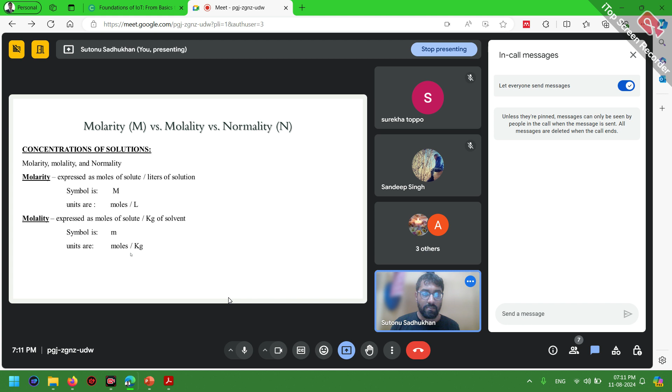Can anyone tell me what is normality? No one? Okay, so I'll again refresh the concept. Normality is basically gram equivalents of solute per volume of solution in liters, which is nothing but equal to mass of solute in grams into 1000, divided by equivalent mass into volume of solution in ml.

Now, as we are studying water science, what will be there in case of water? You see, in case of water, the density is generally dependent on temperature and pressure, but at STP, which is called standard temperature and pressure, the density of water is basically 1000 kg per meter cube, or 1 gram per centimeter cube, right?

So if the solution is very dilute, then you can see the molarity will almost be equal to molality, right? Because if the solution is dilute, then it will basically be 1 kg per liter as the density of water. So then molarity will approximately equal molality. But if the solution is not dilute, then it will not be equal, right? This is true for water only at standard temperature and pressure, it is not true for other solvents.

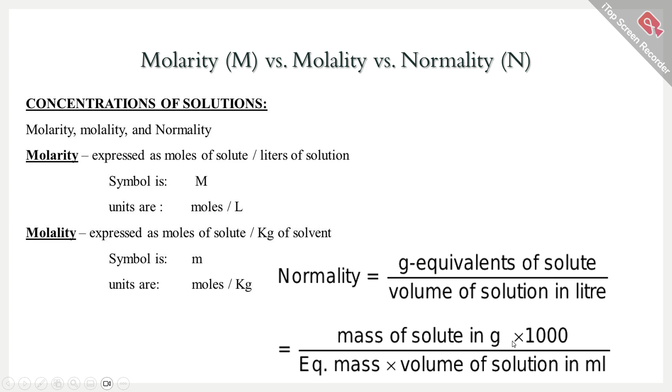And in case of normality, you can understand the definition, I guess. Do you have any doubt? Then you can ask, otherwise we'll proceed to our problem based on this concept.

Okay, now I'll give you an example. Consider calcium carbonate, which is a bivalent salt that causes hardness in water.

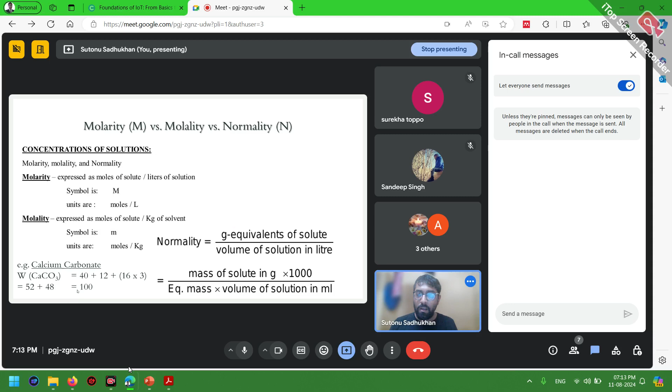In case of calcium carbonate, the weight is calculated as atomic weight of calcium, that is 40, plus atomic weight of carbon, that is 12, plus 3 into oxygen, which is 48. So 52 plus 48 gives you 100. This is the molecular weight of calcium carbonate.

Now, for this compound, if you put it into water, the amount of calcium carbonate that gets dissolved in water gets dissociated into two parts. One is called the cation and another is called the anion. The charge, that is the plus or minus sign with the calcium or carbonate ion, denotes what is cation and what is anion.

You can see, based on the cation, that is calcium, there is plus 2 charge, and carbonate has minus 2 charge. So the valency becomes 2. If you want to calculate the normality of calcium carbonate in water, you have to get the equivalent mass of the calcium carbonate.

How can you get the equivalent mass of calcium carbonate? The answer is with the help of valency.

So how can you get the equivalent weight or equivalent mass? Though weight and mass are not equal, here we are considering them equal. So Eq. W of CaCO3 equals the normal mass, that is 100 which we calculated, divided by its valency in water, which is 2 in this case. So it will be 100 by 2 equals 50.

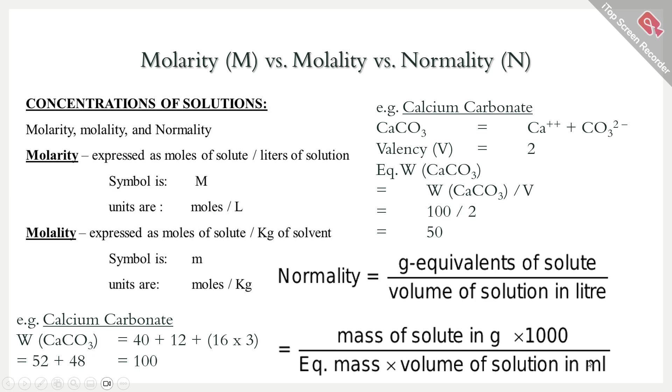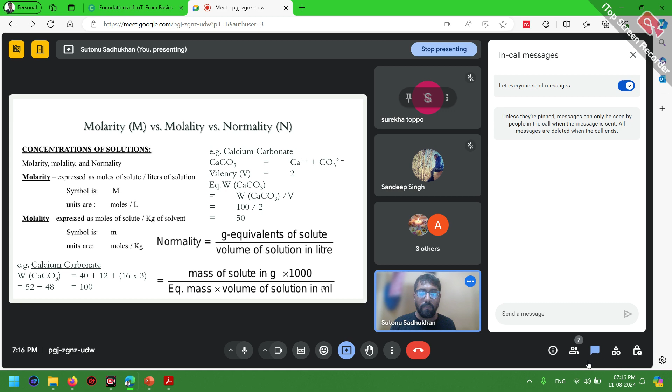Hope the concept is clear. The molarity, normality, and molality concepts should be clear enough so that you can solve the next problem, where the concentration of calcium carbonate is given as 250 milligram per liter. Based on that, you have to calculate the following.

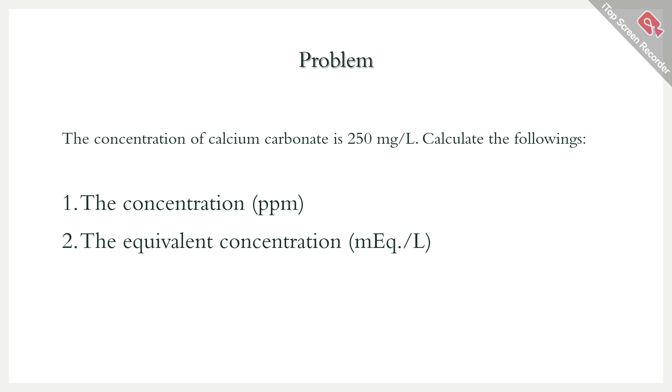Number one is concentration in ppm. Number two is the equivalent concentration in milliequivalent per liter. Number three is the concentration in ppb, and number four is the molar concentration in millimolar. As I've told in earlier classes, you need to determine the units.

If you attach the term milli to anything, that means 10 to the minus 3. Micro means 10 to the minus 6. Pico means 10 to the minus 12. Nano means 10 to the minus 9. And femto means 10 to the minus 15. I have discussed these things in the class.

So you should be able to understand parts per million, parts per billion. What does million and billion mean? Million means 10 to the power 6, and billion means probably 10 to the power 9, I guess.

10 to the power minus 3 means milli, so that means 5 milli equivalents per liter. If you are asked to calculate the equivalent concentration in milli equivalents per liter, it will be 5. Hope it's clear, if any doubt you can ask.

I didn't understand that, please repeat. You can tell.

Now next is the concentration in parts per billion. 1 ppm means 1000 ppb, because one is 10 to the power 6 and the other is 10 to the power minus 9. Billion means 10 to the power 9, million means 10 to the power 6, so the difference is 1000. That means 1 ppm equals 1000 ppb.

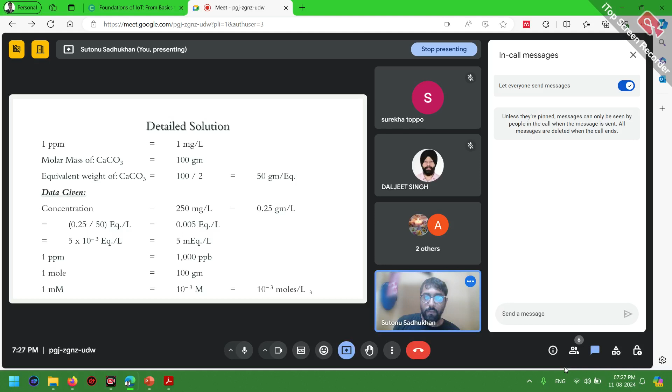So that means if you want to calculate the concentration in millimolar, it becomes 2.5. Any doubt?

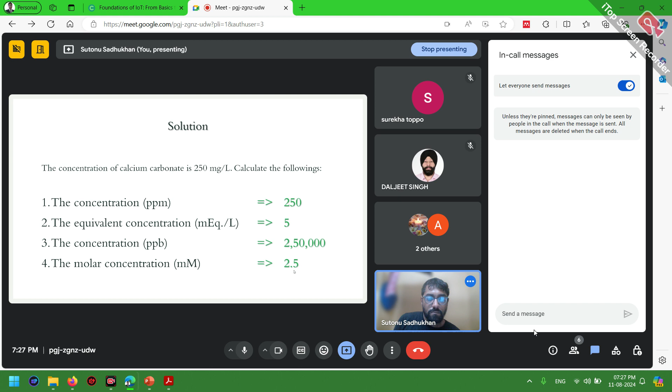You can see that within 1 liter of solution, there is 250 milligram of calcium carbonate. Now 250 milligram of calcium carbonate, if you divide it with 100 gram, that gives you 2.5 moles per liter.

Now what you can see here, they have given the unit in milligrams, not grams. So if you divide it by 100, it will become 2.5 millimole, not mole, which is also present within 1 liter. So that means molar - 1 molar means 1 mole per liter.

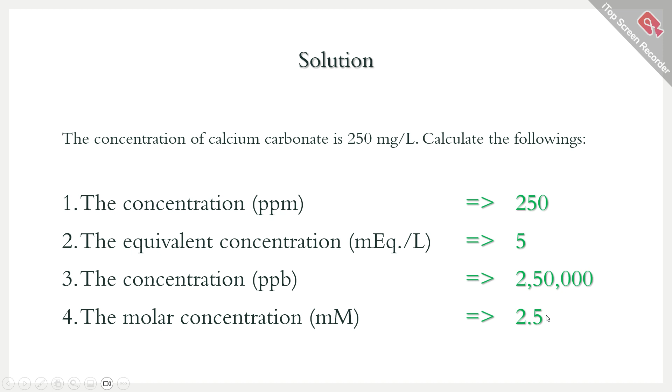1 millimolar means 1 millimole per liter. That's why it is 2.5. Hope it is clear. If any doubt, you can ask.

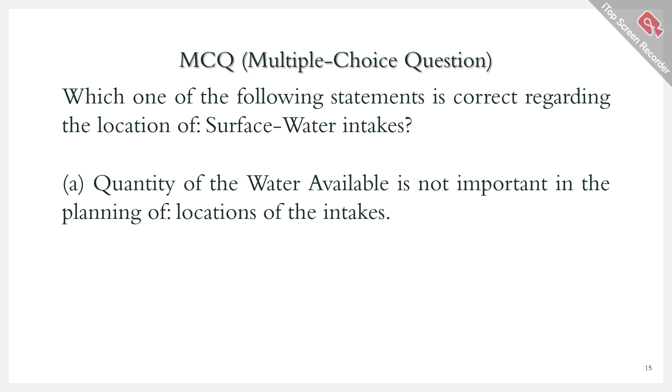Now, next MCQ is: which one of the following statements is correct regarding the location of surface water intakes? Option A: quantity of the water available is not important in the planning of locations of the intakes. Option B: intakes should have sufficient self weight in order to prevent upthrust of water current. Option C: intakes to be constructed close enough to the navigation channels. Option D: intakes to be constructed close to sewage disposal site.

Previously, nobody was able to calculate the answer of this problem, but now it is expected you can type the correct option in the chat box. Those of you who are sitting in a stable manner at home.

Shomdeep has left, I think. Issues.

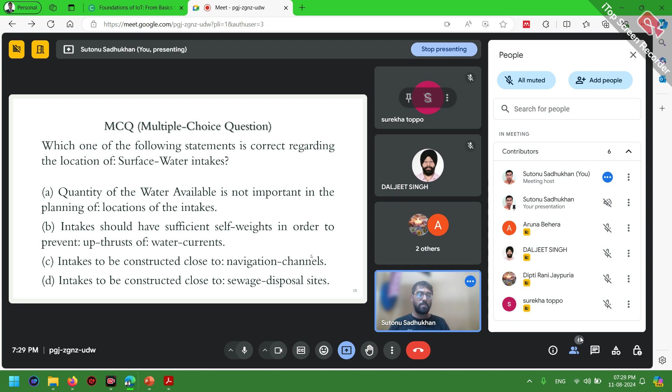So what is intake water? You can see, I told you about the ZLD concept, right? Where you cannot throw any water. The entire water that you are using inside a plant, you have to recycle it back. This is called zero liquid discharge, where you are not discharging any water. Even in that case,

you can discharge water in gaseous form, or there will be losses of water. There will be seepage from the pipeline into the environment. There will be cooling towers to cool down - maybe not only in industries.

Even if you have gone to big hospitals, there you might have also seen centralized air conditioning, right? To maintain that centralized AC, it is not entirely electrically driven. There will be a cooling tower outside that big hospital, or maybe at the rooftop, to cool down the water which is being used as chilling water for your centralized AC.

So in that case also, water leaves the system in the form of gas or vapor, whatever you like to call it. But a certain amount of water needs to be circulated in the system. That's why makeup water is taken. So for the purpose of taking makeup water, you actually have to design water intake.

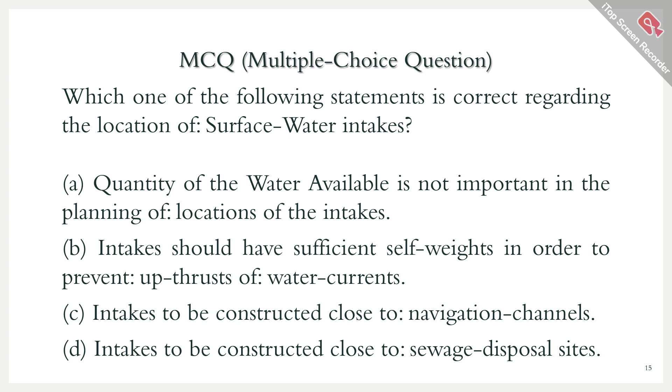What about option A and B? Let's see what is the answer. I have eliminated option C. Nobody is still able to answer. So option B is the correct answer. Intake should have sufficient self weight in order to prevent upthrust of water currents.

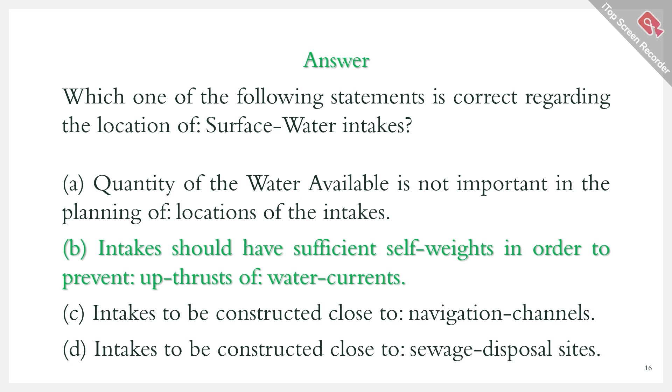Quantity of water available is definitely important for planning the location of the intakes. Why? Because the entire design will be based on that - the capacity of the pump, the sizing of the pipeline. In industry you have to maintain between 1.5 to 2.5 meters per second of water velocity within the pipeline.

It is a thumb rule so that the friction doesn't increase much and there is lesser vibration in the pipeline. Everything is based on that, so you have to design the intake location accordingly. You have to think of it in such a way that the water coming through the river or surface water body - the pipeline is completely dipped into the water. If the pipeline is not completely dipped, what will happen?

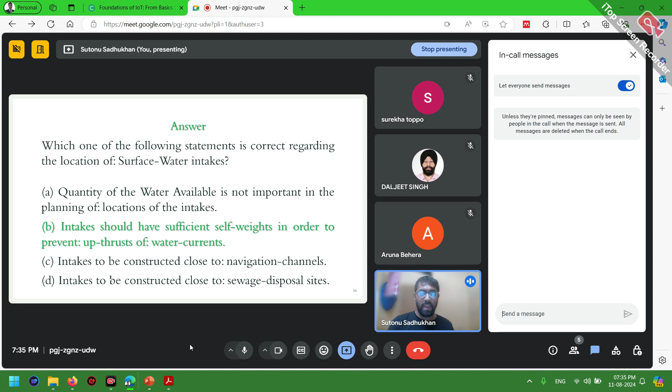Air will get sucked in, creating what is called cavitation in the pump's impeller, and that will damage your pump system or the water pumping system. So option A cannot be true also. Option B is only the correct answer.

You can see a water intake is designed here. Our pump is located at an above elevation and water is taken inside through the suction action of the pump. And you can see why you have to take care of the upthrust.

Let's say if the pipe's weight is not sufficient, what will happen? The water will knock at this bending position. Are you able to see my cursor? So if the thrust is more, there will be breaking in this, or the pipe may get damaged in this position. That's why the weight of the pipe should be sufficient to balance the upthrust of the water.

Also, sometimes what they do is protect the intake portion of the pipe so that the surrounding river current doesn't affect this region - they separate the portion from which they will take water. There will be a gap at the bottom, or there may be at the top, and also you can see there is a casing around the pipe so that the vibration or thrust of the pipe can be transferred into the structural load, minimizing damage in the pipe. So they can provide a casing also.

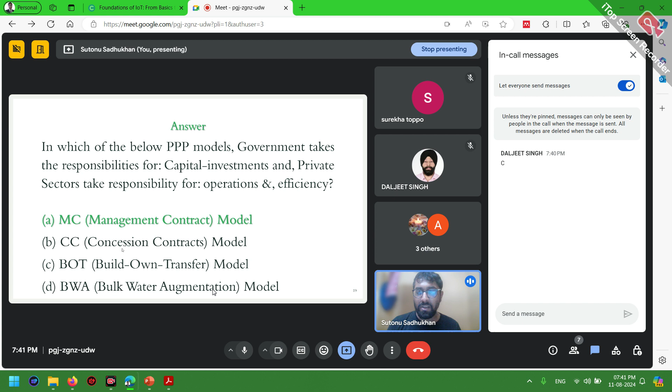And in case of joint investments, who will operate that, how many shares of profit will be shared by whom, these things come into the picture. That's why detailed regulatory and legal things are drafted within this type of model frameworks. So when only the investment is done by the government and the private body takes care of the operations efficiency, it is called the management contract model.

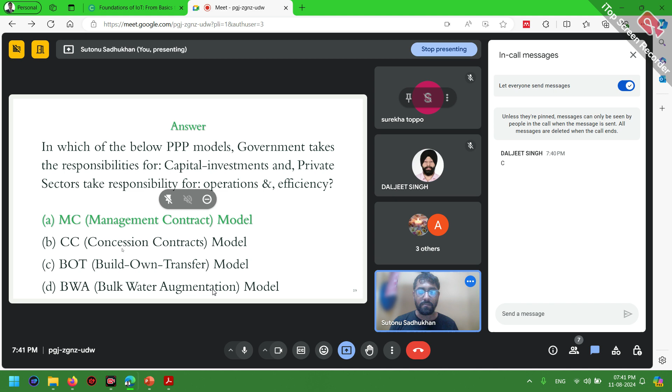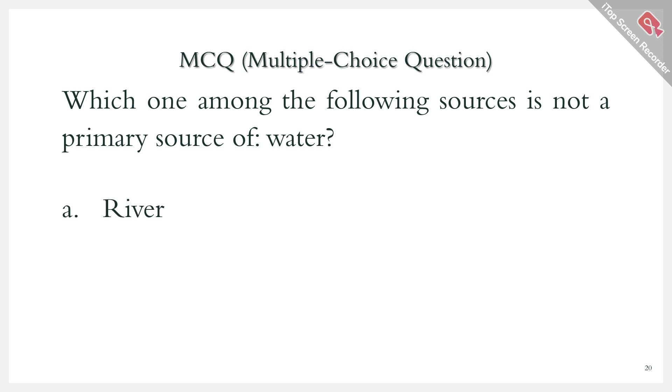Now let's come to our next MCQ. Which one among the following sources is not a primary source of water? Option A is river, option B is glacier melts, option C is canals, option D is rainwater. You can type your answer in the chat box.

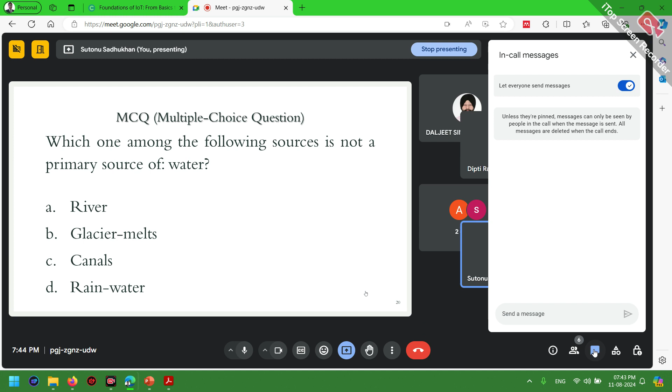You can answer, yes sir. Yeah, have you typed your answer? I have not seen, okay, I'll go with the answer. So the answer is canal.

River, glacier melt, rainwater, these are all natural sources and primary sources. Canal is a secondary source, sometimes human made. They just cut from the river, or they may join two rivers or two water bodies, two oceans maybe, just like Suez Canal in case of Egypt, or Panama, which connects the Atlantic Ocean with the Pacific Ocean. So canal may be natural or human made, but it is mostly a secondary source of water. But river, glacier melts, and rainwater, which are always natural, are primary sources of water.

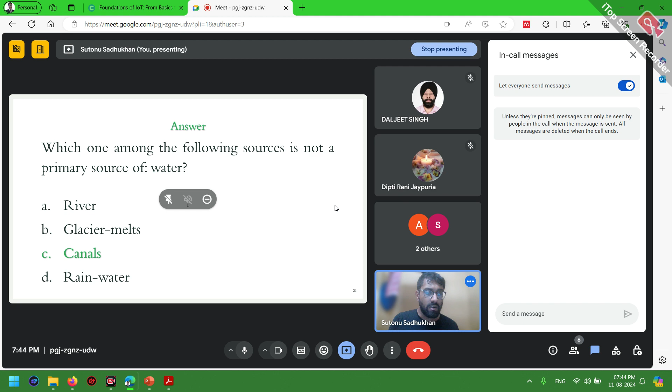Okay, now let's move on to our next MCQ. What is termed as the flow rate of water through an aquifer of unit cross-sectional area under unit hydraulic gradient at 15 degrees centigrade temperature?

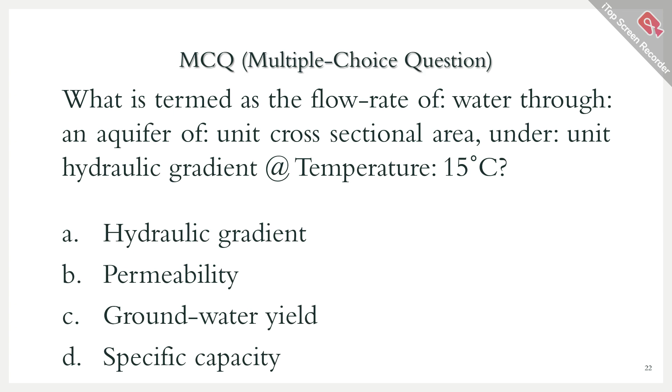Can anyone say what is the terminology without seeing the options? Okay, no one, I guess. I'll tell the options. Option A is hydraulic gradient, option B is permeability, option C is groundwater yield, option D is specific capacity. You can type your answer in the chat box.

So the definition is flow rate of water through an aquifer of unit cross-sectional area. That means flow rate divided by area. What is it? I have already told you. Flow rate divided by unit area means flux, water flux. Water flux through an aquifer under unit hydraulic gradient at temperature of 15 degrees centigrade, this is the definition. Water flux per unit hydraulic gradient at 15 degrees centigrade.

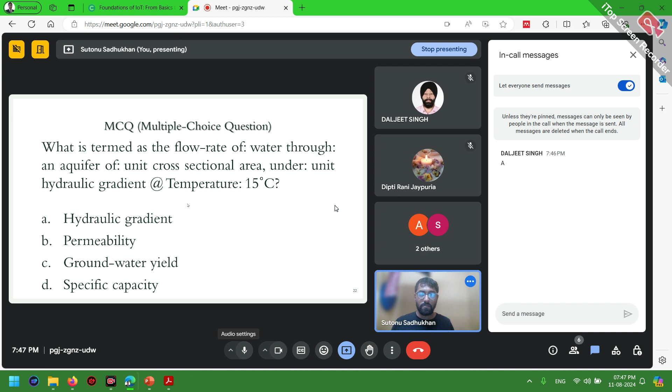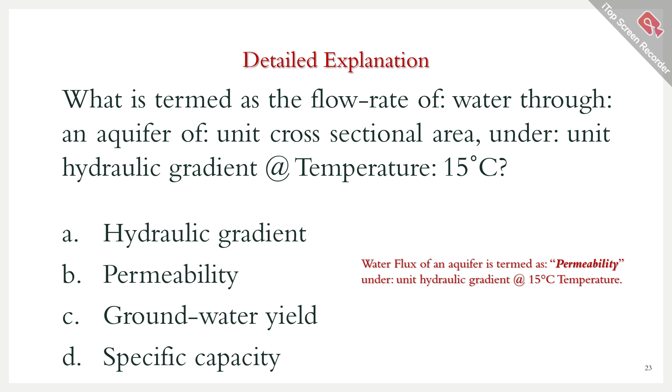What is it? Daljeet is telling us hydraulic gradient, but the terminology itself is per unit hydraulic gradient, so option A cannot be the answer. So it will be either B, C, or D. Okay, so we'll move on to the answer. Water flux of an aquifer is termed as permeability under unit hydraulic gradient at 15 degrees centigrade temperature. So option B is the correct answer.

Permeability. Now if you see, as I told in earlier classes, flux means rate per unit cross-sectional area. Right? Now rate means driving force divided by resistance. That I have also told you.

Here, what is the driving force? Hydraulic gradient is the driving force.

So hydraulic gradient by resistance is nothing but rate. If you put cross-sectional area as 1, that is unit cross-sectional area, then the flux becomes equal to the rate. Now you take the driving force to the left hand side, that is rate or flux divided by the hydraulic gradient.

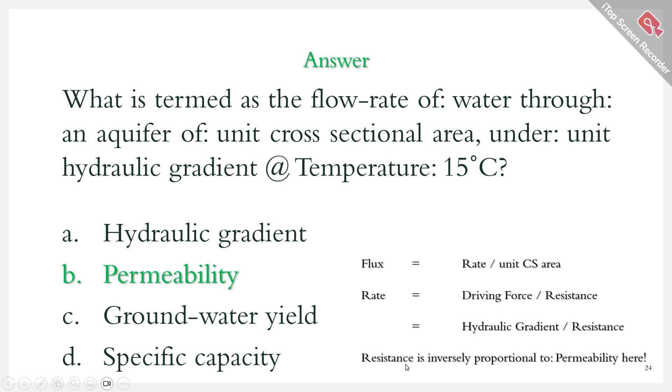That becomes 1 by resistance, which is nothing but permeability. So resistance is inversely proportional to permeability. If you increase the permeability, the resistance decreases. If you decrease the permeability, resistance increases. That means permeability is nothing but the inverse of the rate, inverse of the resistance. This is how it is defined.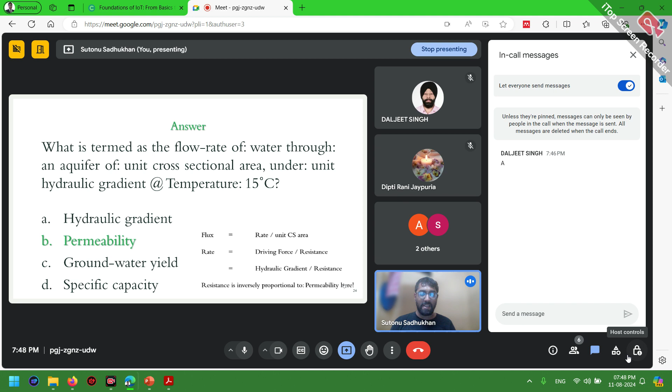So if you just think about the term, resistance means what? It is resisting the water flow. Simple. Now what is permeability? It means it is aiding the water flow. Permeable. It is making the water flow more. So naturally they are inversely proportional, right? And mathematics also says it is inversely proportional, right?

Which is publicly owned utility that is managed by private operators. Private operators is responsible for both operation and investments. Option R is infrastructure assets are sold to the private investors, and option S is private investor has minority share, operates and shares its final gains. Now you have to match the particular public-private partnership with its particular functional methodology.

You can keep this order same, 1 2 3 4. You can just tell me this correct order of PQRS. I'll wait for 2 minutes for you to figure out.

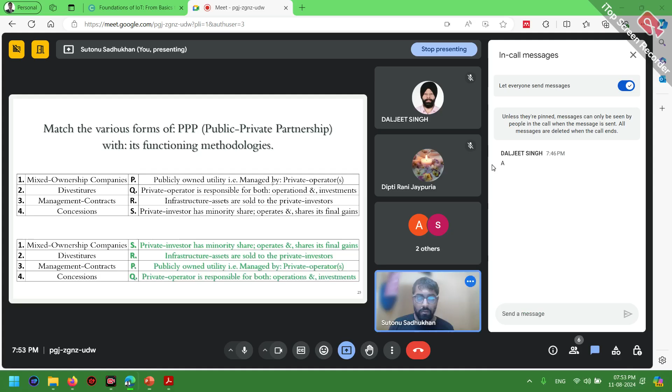Okay, now we will move on to our next one. We'll move on to our next MCQ.

So which law states that the rate of laminar flow is directly proportional to the hydraulic gradient and the area of the cross section of the soil? Which law states that? Can anyone say without options?

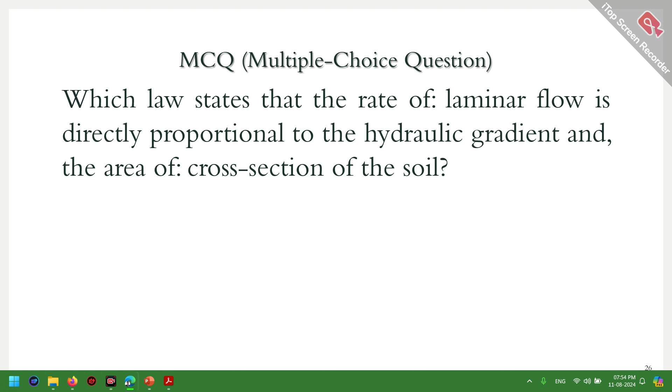You people are watching Dr. Pundit's lecture or not? Some questions are directly from those lectures, some are new concepts. Those new concepts are also from +2 level. If you had science in +2 level, you should be able to answer.

Maybe you have forgot, no issues. So the options are: option A is Darcy's law, option B is Bernoulli's principle, option C is Archimedes' principle, and option D is Newton's laws of motion.

Newton's laws of motion, three laws, all of you know, I guess. What is Archimedes' principle?

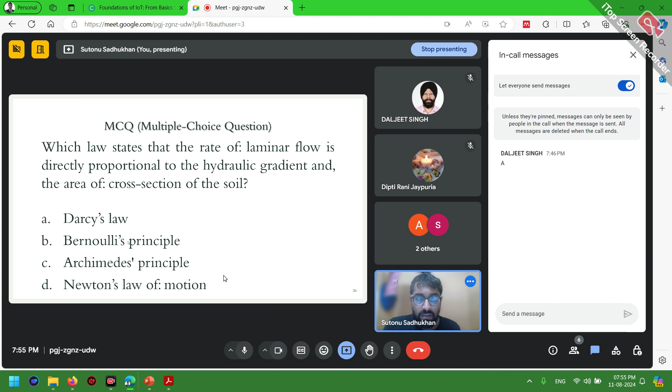Archimedes' principle is if you submerge completely or partially one solid inside the water or any fluid, that may be gas also, not only liquid, what will happen? That solid material will feel an upthrust inside the fluid, right? So that upthrust will nullify the weight of the solid. That solid particle should not be dissolved quickly, so if it gets dissolved, it becomes liquid. So it should not be sublimate, that means not dissolvable in gas, right?

Then only you can check and measure if you get sufficient time to measure its weight. So you will feel light, right? Because the upthrust will reduce or completely nullify the weight of the material. The amount of upthrust that will be experienced by that solid material, that means the amount of the force, upthrust force, that is called as the buoyancy force.

The value or magnitude of the buoyancy will be equal to the weight of the fluid, whose volume is equal to the displacement, equal to the volume that is displaced by the solid particle. So if you are completely submerging the particle, that means you are completely displacing the fluid, that is the displaced fluid volume is equal to the entire submerged volume of the particle.

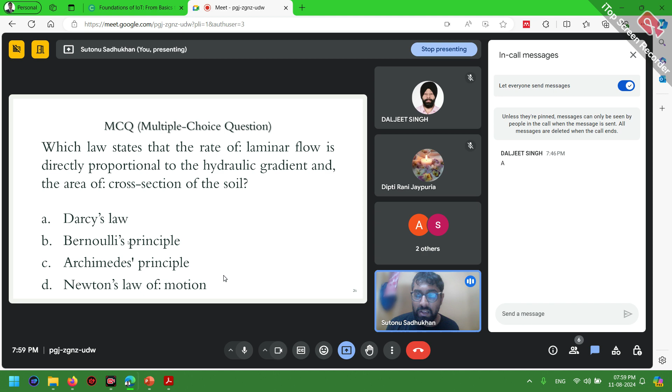So all these three are not related to our question. What is basically the proportionality of laminar flow rate with the hydraulic gradient and the cross sectional area of the soil? Flow rate is directly proportional to hydraulic gradient and cross sectional area of the soil. It is given by Darcy's law. Option A is the correct answer.

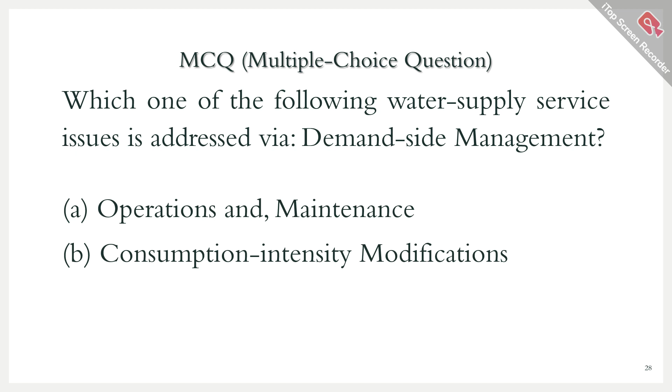So our next MCQ is: which one of the following water supply service issues is addressed via demand side management? Option A is operations and maintenance. Option B is consumption intensity modifications. Option C is supply investments, and option D is reduction of losses and leakages. These are all water service issues, issues related to water supply service.

Which one among these issues can you manage by demand side management? That is the question. Supply and demand, there are two sides.

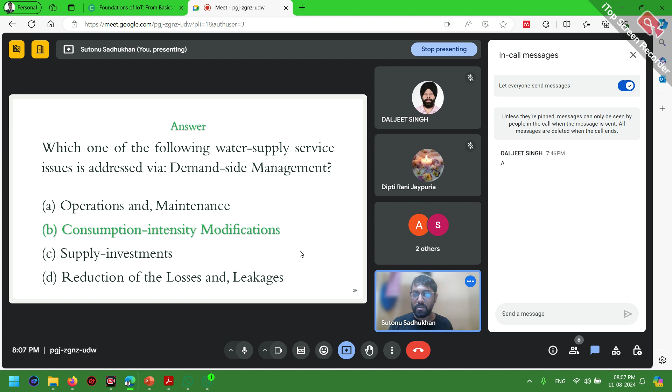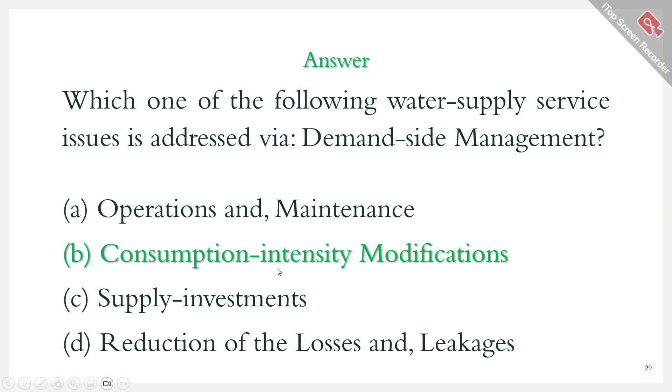Sir, B - consumption intensity modification. Yes, you are correct. The answer is consumption intensity modification. Reduction of losses and leakages, supply investments, operation and maintenance - these are all issues related to the supply side, not the demand side. Only consumption intensity modification is related to demand side management. Now hope you understand what is the supply and demand thing.

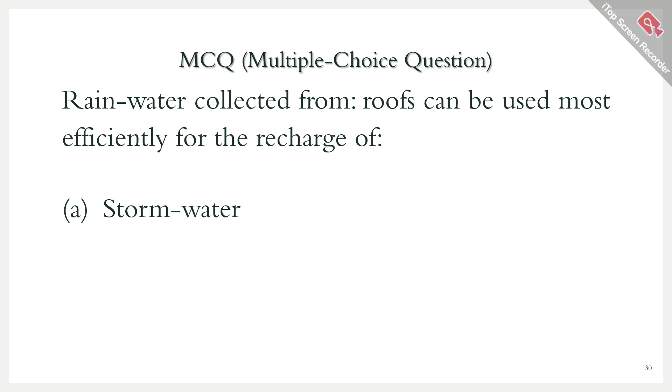Now the next thing is again an MCQ. Rainwater collected from roofs can be used most efficiently for the recharge of: option A is storm water, option B is surface water bodies in urban areas, option C is aquifers, and option D is wastewater treatment plant.

Recharge of what? I mean, all of the options that have been given here. Sir, A, storm water. Okay, so all of the options given here - basically rainwater collected from rooftops contributes to all of the four options. So all four options are contributed by the rainwater collected from rooftops. But the term recharge, that means something else.

Sir, option A, I will tell. So you see, all of the four options, rainwater is a contributor, but the term recharge is particularly associated with one of the four options. So that's why one option will be correct. Otherwise, if the term recharge was not used, all of the four options would be correct, I guess. So let's see what is the answer.

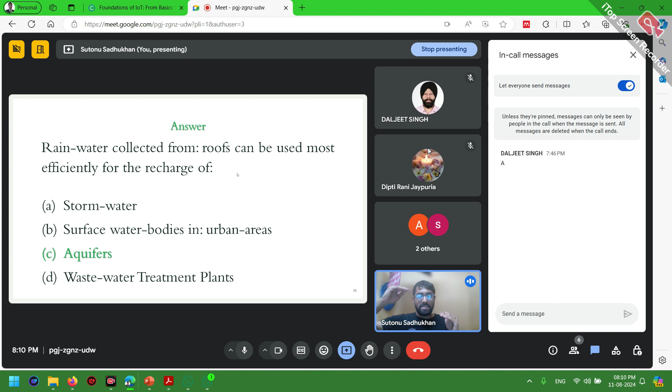That means there is a tendency of water, if the water body is there and it is connected by something, then if one water body is at height A and another is at height B and they are connected, and A is higher than B, then the top surface of B has a tendency to rise to the height of A. So water has a tendency to be equalized in terms of heights, right?

This is the phenomena we see in case of aquifers. If there is a hill and a valley, and you dig a bore at the top of the hill, water will come up, right? Because water is present there - you can put a shallow tube well and get water at the hilltop. But the entire soil present inside the hilltop and the valley is porous, so water present in the hill is connected to the valley region.

So if people present in the valley region just want water, what will they do? They don't have to dig a deep bore in the valley region. They will just do a very shallow digging, and due to the equal height property of water, it will just sprinkle out in the valley region. People will just get the water. Why? Because the water is at a higher height in the hilltop, connected through the porous soil with the groundwater of the valley region. So it is basically the connection between the groundwater.

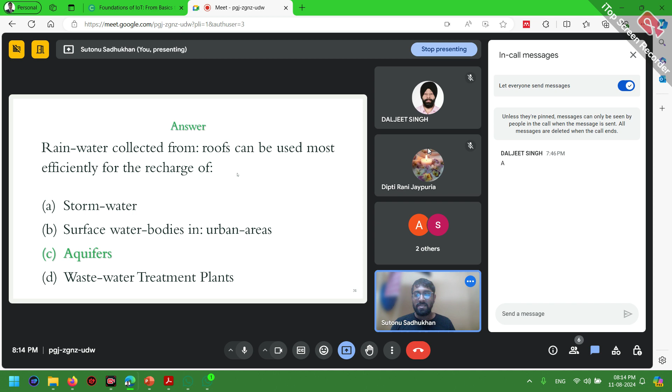And I hope it is clear.

Now we'll move on to our next problem, where a table is given to you with the population of a particular region, showing how the population is increasing over the years after every 10 years interval. In 1981 it was 45,000, in 2001 it was 90,000, in 2011 it was 1 lakh and 5,000, in 2021 it was 1 lakh and 30,000.

Based on this data, you have to forecast the population of the year 2031. You can see a 10-year interval in each of them, so you have to forecast the population for 2031. And for this forecast, you have to use a method called the incremental increase method.

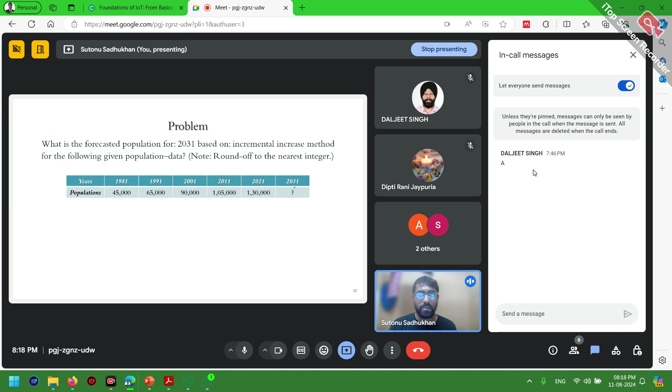Okay, so I guess nobody is raising hand, so I think I should proceed with the solution, right? Nobody remembers the formula. So the detailed solution goes something like this.

The population is given. You have to first calculate the increase in each of the 10 years. Within the first 10 years, the increase was 65,000 minus 45,000 equals to 20,000. At the year 2001, starting from 1991, the increase was 90,000 minus 65,000 equals to 25,000. From 2001 to 2011, within these 10 years, the increase was 1.05 lakhs minus 0.9 lakhs equals to 15,000. From 2011 to 2021, the increase was 25,000.

Based on this data, the total increase is 20,000 plus 25,000 plus 15,000 plus 25,000, which is nothing but 85,000 - the total increase. Now you have to calculate the average increase, which is 85,000 divided by 4, which gives you 21,250.

Now this average increase is termed as small m. This small m is a term within the incremental increase formula for projecting population.

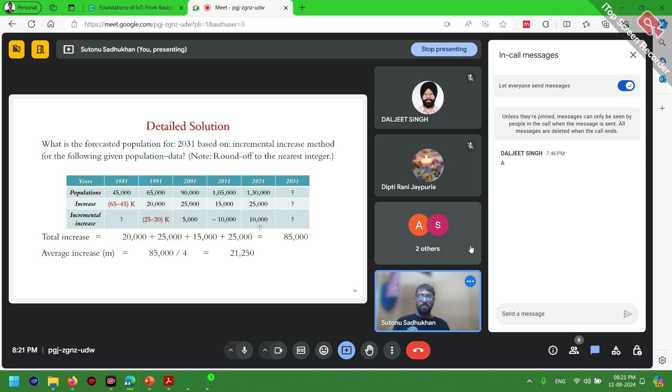Now you have to calculate the total incremental increase and average incremental increase from this data. The total incremental increase becomes 5,000 minus 10,000 plus 10,000, which is nothing but 5,000. Now average incremental increase is given by summation of the three data, 5,000 divided by 3, which is nothing but 1,667. This average incremental increase is termed as K, another term used to project population based on the incremental increase formula.

So what we have done here: the years are given, the populations are given, we calculated the increase and the incremental increase. Based on the increase we got the value of M, and based on the incremental increase we calculated the value of K. Now this M, K and N - these three things will be used to get our solution.

Okay, so what is the solution?

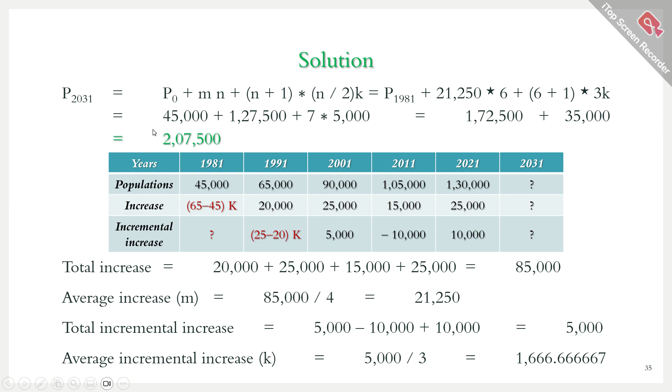So 45,000 plus 1,27,500 gives you 1,72,500, and 7 into 5000 gives you 35,000. Summing them up, this is the answer: 2,07,500. Okay, so this is your answer for the incremental increase method.

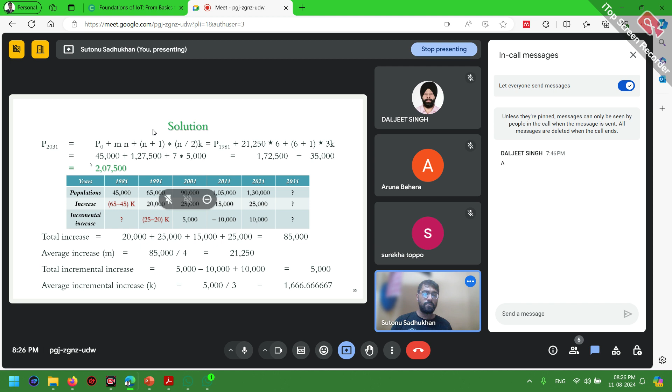Now with your permission, if you have understood it, I will move on to our next MCQ. So if there is any doubt for the last question, you can ask, otherwise we move on to our next MCQ.

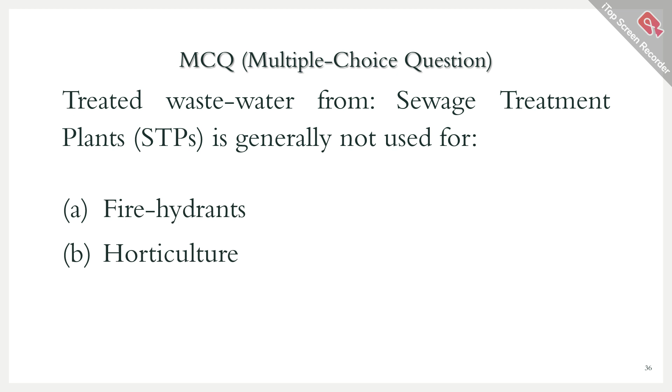So next: treated wastewater from sewage treatment plants, that is STPs, is generally not used for option A, fire hydrants; option B, horticulture; option C, construction activities; and option D, drinking. Which one among the following purposes is not served by a sewage treatment plant?

You can think of it as — this is a very easy question. Yeah sir, it's D, yeah.

Because the water that comes out of a sewage treatment plant is very crude. There is no RO, UF — these are not there, membrane treatment generally is not there. It's just your activated sludge process, then the water just comes out, that's all. So superfine standards are not maintained at the outlet of a sewage treatment plant.

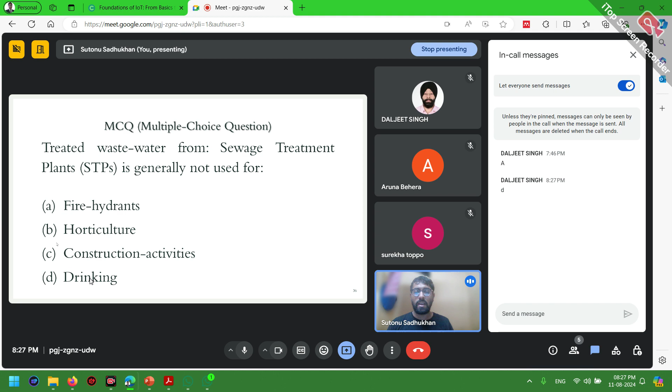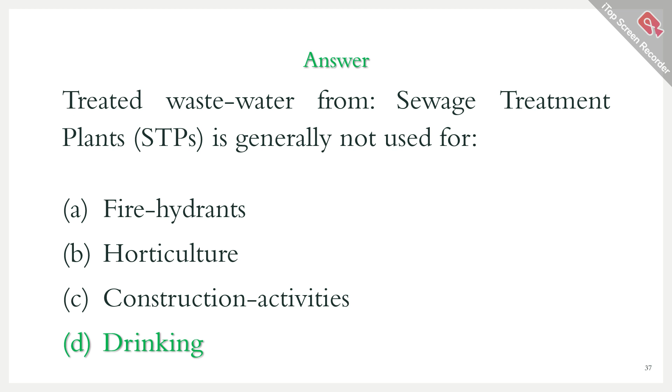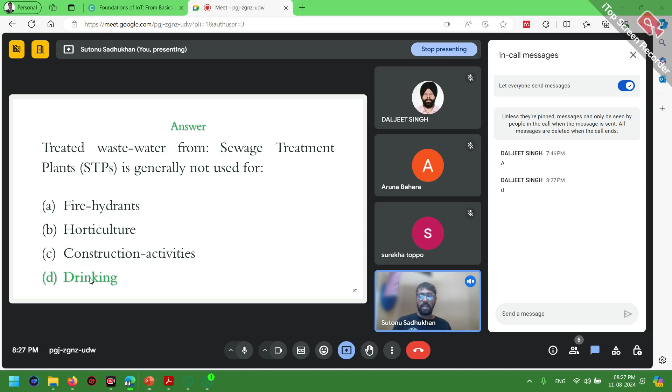That means for drinking purpose, we cannot use the treated wastewater coming out of the STP. All of the other three things — fire hydrants, you can use that water for fire fighting; for horticulture also, because it's basically like agriculture; and for construction activities also you can use that.

Now a table is given to you again. In the left hand column, there are vegetated swales, permeable pavements, and rain gardens. So these three are recharge structures. You have to match them with their descriptions.

Those are given in the right hand column: option P is structured landscape reservoirs, option Q is constructed depressions, and option R is allowing runoffs to percolate through paved surfaces. So you can keep 1, 2, 3 as same, and tell me the order of P, Q, R.

You can write in the chat box. I'll wait for one minute more, then I'll proceed with the answer.

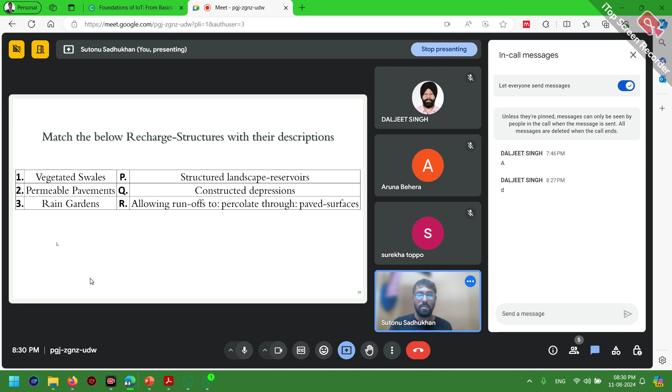Okay, now what are you able to guess? So the answer is something like this.

Vegetated swales are nothing but constructed depressions. Permeable pavements allow runoffs to percolate through paved surfaces. The term permeable pavement means, like the way I told you about paved and unpaved area, unpaved area means where naturally water can pass through. People thought that if we make the pavement with materials which will allow groundwater recharge, that will allow the runoffs to percolate through paved surfaces. So that becomes a special artificial pavement, not regular concrete or RCC structures. They are called permeable pavements, which act just like unpaved area for groundwater recharge.

Rain gardens are basically nothing but structured landscape reservoirs. So QRP is the correct order.

Now we'll move on to our next concept. Here we will compare conventional water or wastewater treatment technology, I mean conventional treatment technologies, with the membrane-based technologies which are coming nowadays, very advanced. So what are the conventional treatments in place basically? We will see a few conventional treatment technologies.

One student actually asked a question in an earlier class about oil water treatment. So all of these technologies which we are going to discuss now are especially for oil and grease removal, and some of them are used for other treatments also.

If you see, there is oil in water. Oil's density is basically less than water, and the solids which are mixed with the oil become settled at the bottom of the pot, because solid density is the highest, then comes water's density, and oil density is even lesser, generally less than 1 gram per cc compared to water.

When people do drilling activities in the sea, offshore, just like in our country ONGC and Oil India Limited are companies that do drilling activities within the sea to extract oil from under the seabed. Now, by digging the ground when you are extracting that oil, there is a high chance that the oil gets mixed with the water. So in this way, neither the oil nor the water is usable. You have to separate them out.

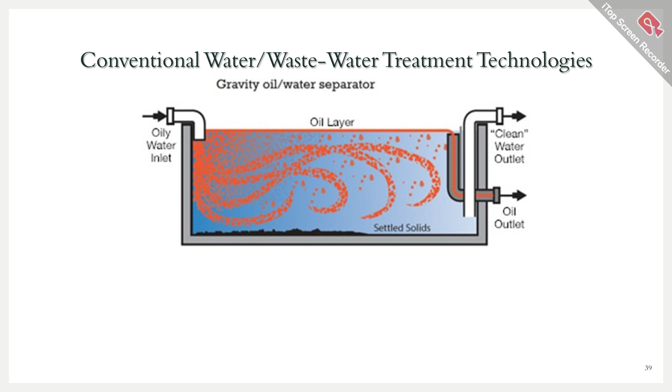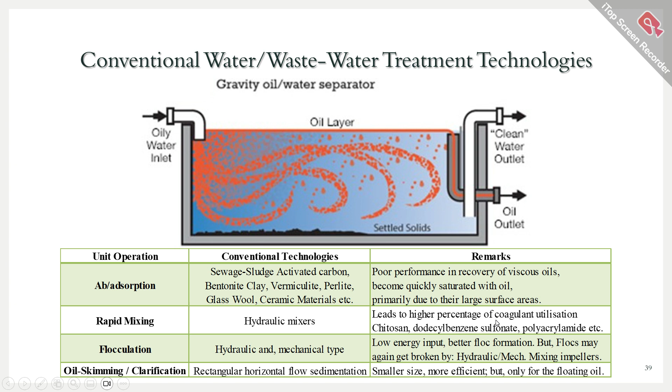It has smaller size, more efficient, but only for the floating oil, not the oil that is inside the water, not floating at the surface level. So oil skimming clarification is not beneficial or efficient for the treatment of water. So here the membrane technologies come into the picture.

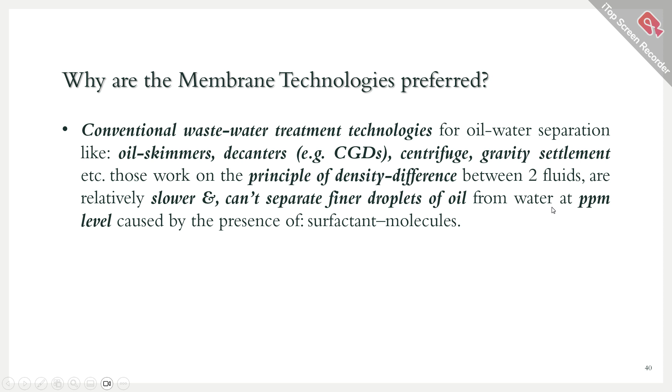The conventional wastewater treatment technologies for oil water separation, like oil skimmers, decanters, for example continuous gravity decanters like CGDs, centrifuges, gravity settlement, etc., work on the principle of density difference between two fluids and are relatively slower and cannot separate finer droplets of oil from water at ppm level caused by presence of surfactant molecules.

That's why state-of-the-art ultra and nanofiltration membrane technologies are the most efficient and effective ones to perform industrial oily wastewater purification, where the pollutants present are very complex in nature, and are very promising to meet future industrial requirements while obeying environmental norms, which are constantly becoming more stringent day by day. This is why membrane technologies are preferred.

So now I will introduce a bit about...

Sorry, my connection was gone again. I don't know from where you people missed it. Just wait, let me check the connection. Yeah, it is there. So please, I don't know which slide was missed. Just wait, so did I go through this slide? Are you able to attend this slide or not? Sir, this state of the art has been gone through, sir, it has been explained. Okay, you came across this slide, right? I mean sir, we crossed this slide.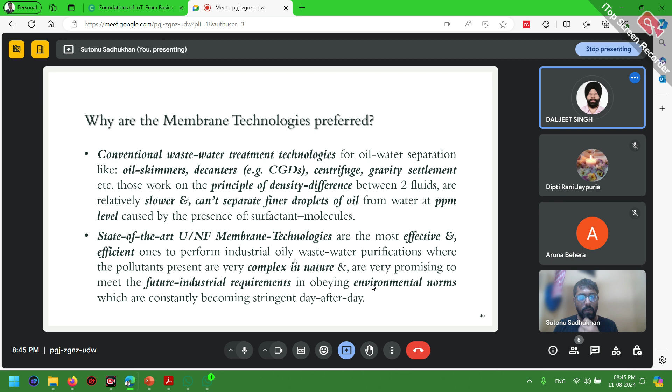Okay, so this is nothing but explaining why membrane technology is better than the conventional technologies for water treatment. So I am just giving you a bit of introduction because we will solve one problem based on this concept.

Membrane processes are my expertise area at IIT Bombay basically, so that's why I'll solve a problem which is relevant to the water supply part, where you are treating the water and supplying based on the capacity or head requirement of that particular city.

So to understand that, I will first go through the defined membrane technologies. These are MF, UF, NF, and RO - MF means microfiltration, UF means ultrafiltration, NF means nanofiltration, RO means reverse osmosis. So why are their names different? Because of the pore sizes present inside the membrane.

Have you heard about sieves? If some of you are civil engineers, before some construction activities, people take sand and mix it with cement. So they do the sieving of the sand so that the larger sand particles get retained, and the smaller, finer sand particles which they actually want to make the cement-sand mixture come through the sieves. That's all - membranes are nothing but sieves.

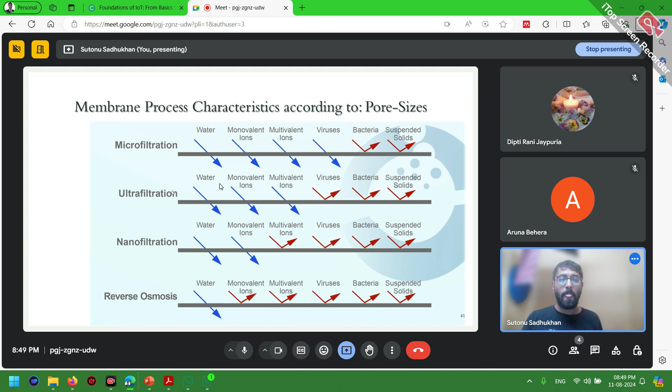So simple concept: MF, UF, NF, and RO. Hope this is clear. Based on this concept, water, monovalent salts, multivalent salts, and viruses will all pass through microfiltration. Bacteria, since their particle size is basically that of living beings, you may consider them as particles. Their size or diameter is more than 10 to the power minus 6 meter, or 1 micron, so they will be retained.

If there is virus present inside the water and you want to retain them, you have to use ultrafiltration. If there is no virus, you can safely use microfiltration.

Nanofiltration means what? Along with everything ultrafiltration retains, it also retains multivalent ions, like bivalent ions such as calcium and magnesium. If you want to remove hardness from water, which is caused mostly by bivalent ions, you have to use nanofiltration. But monovalent ions, like sodium chloride, which is basically common table salt, will get passed through.

If you want to retain everything, just like making distilled water, you have to use RO, reverse osmosis. So everything will be retained, and only water will pass through.

You may ask, then why not distillation itself? You can just boil the water, everything will get retained, and only the water vapor will pass through, which you condensate and use. Why are we not doing that? That would be very ultra pure water, right? So why are you not doing that?

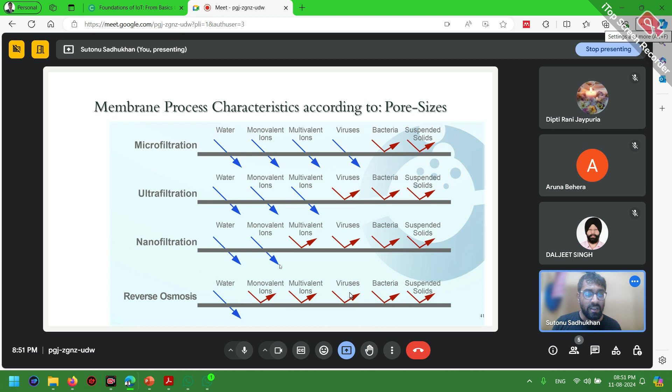Hope I was able to give you a basic, very brief concept on membrane processes. Now only 10 minutes left, we will solve a problem based on this concept.

Now you can see microfiltration: the pressure you have to apply with the help of a pressure pump is 0.1 to 3 bar, and the pore size ranges from 0.1 to 5 micrometer. I told you it's around 1 micrometer.

For ultrafiltration, you apply pressure across the membrane for water to pass through while bacteria, virus, or suspended solids are retained. If you are sieving something, only gravity acts as the driving force, but here you have to apply pressure to pass the liquid through the membrane. For ultrafiltration, it's 2 to 10 bar, and the pore size is around 20 nanometer to 0.1 micrometer.

0.1 micrometer means 1 nanometer, I guess, right? No, not 1 nanometer, it is 100 nanometer. So 20 nanometer to 100 nanometer, or you can consider 20 nanometer to micron, meaning 0.02 micrometer to 0.1 micrometer. This is called the ultrafiltration range.

In case of nanofiltration, the pressure is even higher than ultrafiltration, around 5 to 30 bar. As you can see, the pores are getting smaller and smaller, so you require more pressure for the liquid to pass through the membrane.

For nanofiltration, the pore size is more than 1 nanometer. RO is around the 1 angstrom range, which is 0.1 to 1 nanometer, and it requires the highest applied pressure.

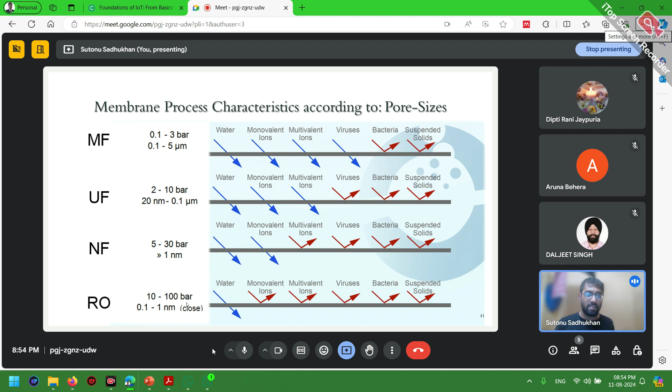So whatever we have stated here, all the pressures are in bar, not bar gauge. If that is gauge pressure, it will be expressed as bar G. It is not there, so it is simple pressure in bar. Okay, so now we will see the problem.

The problem is based on demand and supply of water. Recommended per capita water supply levels for designing are given. You can see there are three serial numbers, three recommendations. These recommendations are nothing but maximum water supply level in LPCD unit, that is liters per capita per day. So there are three recommendations: 70 LPCD, 135 LPCD, 150 LPCD.

When will you use 70 LPCD? You will use this level of water supply when towns are provided with piped water supply but without sewerage system. So if the sewerage system is there, then you will not use that.

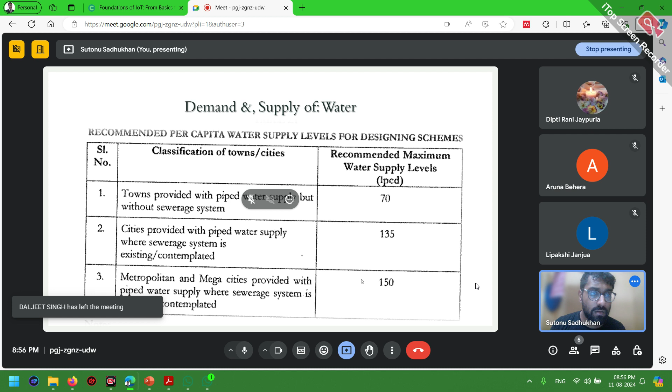Now for cities provided with piped water supply where sewerage system is existing or contemplated, in that case you will use this maximum water supply of 135 LPCD. Now for metropolitan and mega cities provided with piped water supply where sewerage system is existing or contemplated, then you will use 150 LPCD.

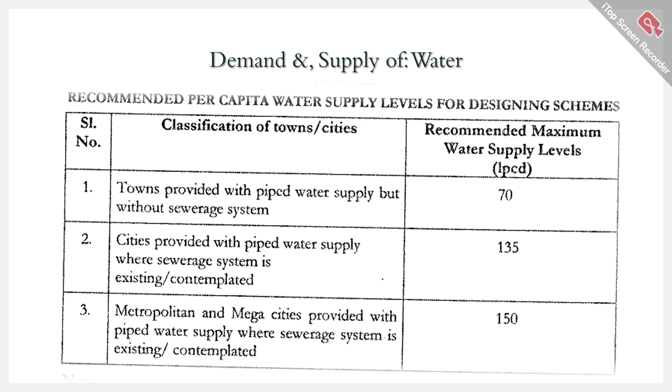So now, based on these three recommendations, we have to solve this problem on demand and supply of water. The type of city is given to you, where the city is provided with piped water supply where sewerage system is existing. Population for a community is given as 8,000. Source of the water is given as surface water. Characteristics of water to be treated: only suspended and bacterial impurities are present inside the water. Number of working hours of the treatment plant is given as 18.

Now the question is: first you have to determine the total water demand. Second, you have to determine the water to be sent for treatment. Third, you have to determine the treatment train with membrane processes. Finally, you have to decide the number of modules required if the flow rate per module is 120 liters per hour. This is the question.

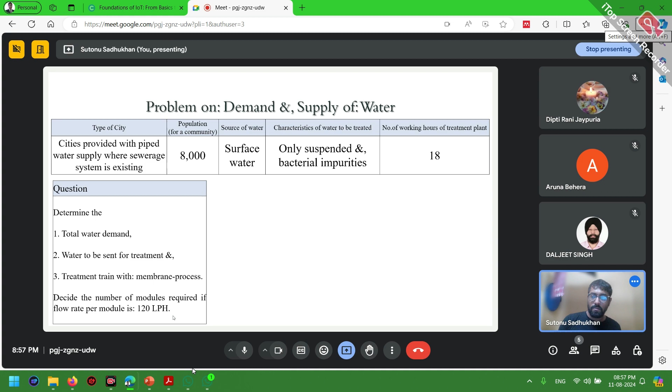Let's go for the solution. Should we solve this problem today or tomorrow? This was the recommendation that we just discussed in our earlier slide.

So this is the thing, you have to calculate all these three parameters. How much more time are you willing to give me? It will take 5 or 10 minutes more if we are going to solve this problem. Otherwise we may solve it in our next class also, whichever you prefer.

What do you say? Please raise your hand if you want me to solve it in this class. Okay, so nobody is willing to solve it in this class, I guess. Everybody is exhausted, so it's better if we solve it in our next session. Oh, somebody has raised their hand.

Okay, let me see how many more slides there are for solving this problem. It will take around 10 slides, so I am also not willing to solve this problem. We'll solve this in our next session. We'll start our next session based on this problem.

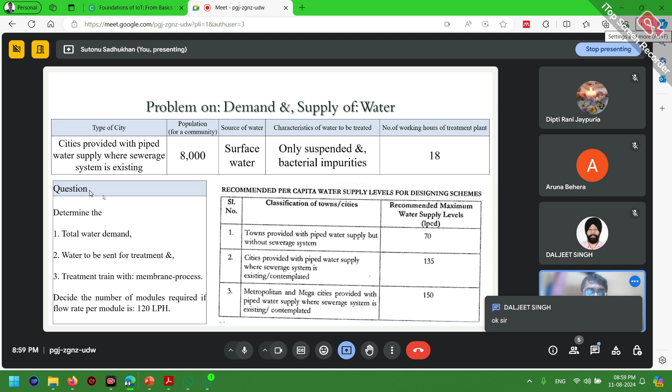This is a design problem completely at par with what water supply, water treatment, supply, and drainage means. It is entirely an urban system. It's very relevant, I think. So we'll start our next class with this problem, and we'll end this session within 1 minute.